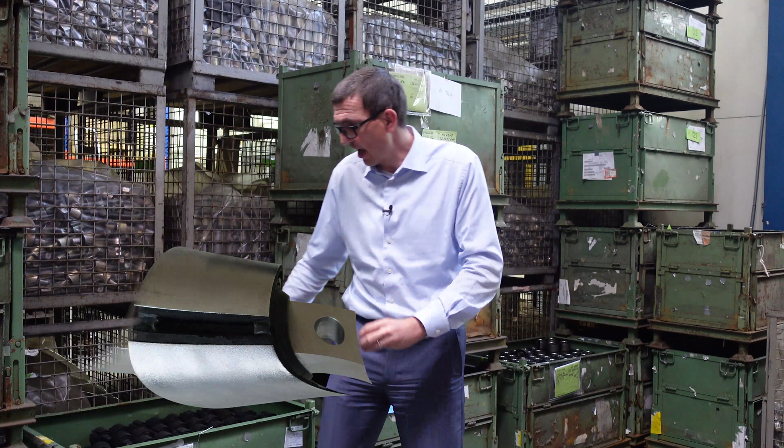Today, I want to continue to talk about further activities. We have applied this technology to a new group of products, to slit bushes. I have prepared a slit bush here. Oops, sorry. Here you see the slit bush. That's the typical slit. That's a bush with a pin, with a metal pin. If you want to learn more about slit bushes, I refer to our videos regarding slit bushes, where you can see how a slit bush works in detail.

This bush consists of a pin, of a solid pin, and cylindrical parts in the middle. So we did the same as we did for the spherical joints. We just replaced some heavyweight steel material by plastic. With this part, we achieved a weight drop by around 850 grams, which is again more or less a third of the overall weight of the original part. So that's pretty nice, I think. That's a pretty good achievement. And of course, we've performed all the FEA calculation as well.

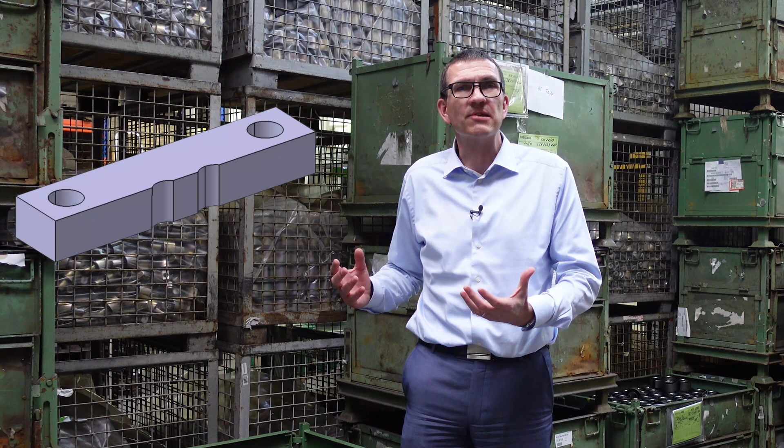So how did we do that? I would just put that away, because even if it's light, it's still heavy after a while. Okay, well, how are we going to do that? You can see here the pin, how it looks. It's a very cubical design, and it looks a little bit strange with these 2 rails there, with the 2 notches there on the side, but very smooth notches, not very sharp notches, so not critical. And it's made of flat steel. It's made with a very minimum of machining.

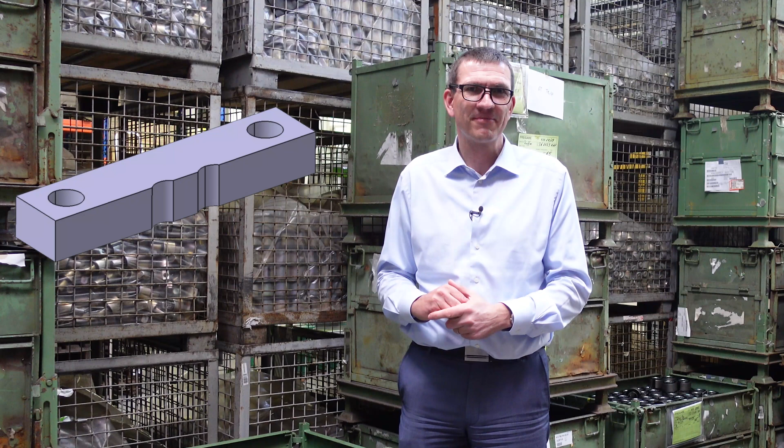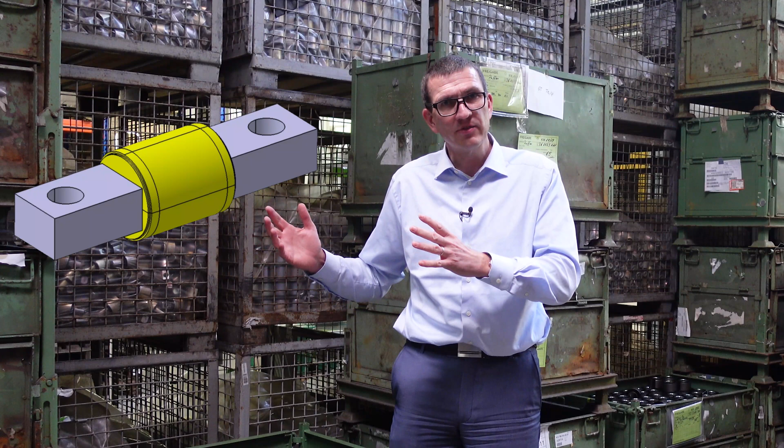And next step is we have 2 half shells made of plastic, and then we move them together, we assemble that, we mount that together and get one cylindrical overall pin. So this pin then will be taken and put into the vulcanization tool, and we do the vulcanization process as it would be very normal with a classical pure metal pin design.

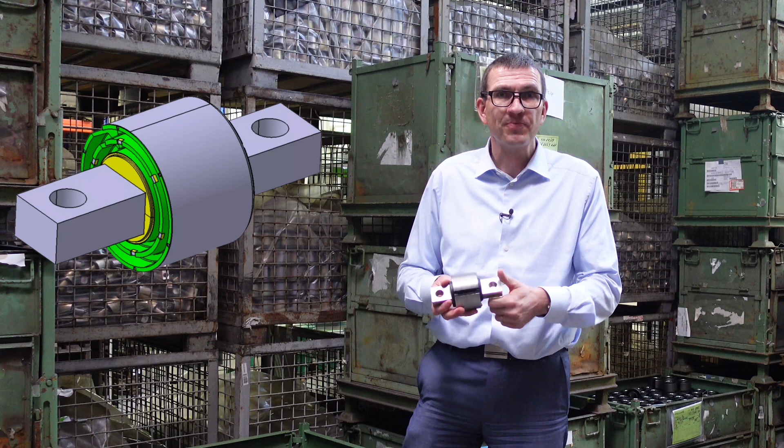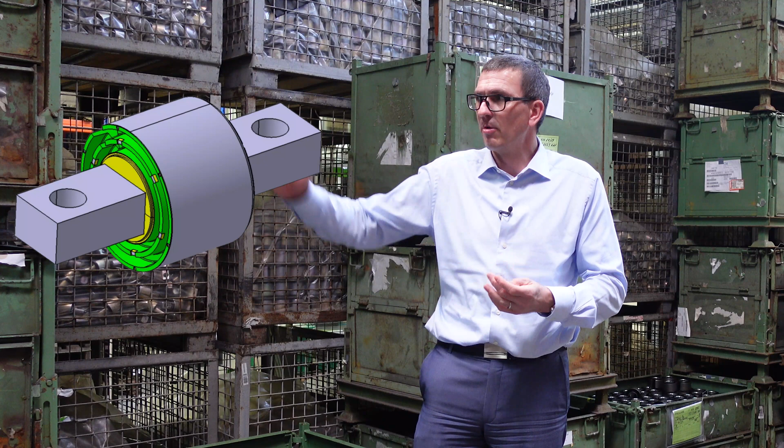So, and then from the outside, it looks like a very normal slit bush. So from this perspective, you can't distinguish this lightweight design. I mean, you could if you would hold it in your hand, but just optically, you can't distinguish this one from the classical heavy design. And of course, to get a little bit more idea about the details, we've just cut off one edge so that you can have a look inside.

And of course, our spherical lightweight design part was built the same way, so we have another cut of this part here. So what's the trick with the flat cubical pin? The trick, the idea, is to use a flat steel material which is drawn in advance and then very cheap. So it's produced with the final tolerances, with the final dimensions, and we just have to machine the two holes

and machine the notches. Talking about the notches, actually the notches are the main difference of this pin design to a classical pin design. Taking a normal slit bush with a solid pin like this one here, you see a sharp notch here in this area, in this edge. Can you see that? And if the pin cracks in operation, it will start here or there.

And this is the big plus, the big advantage of the new design, because we've just taken out these kinds of notches. So if you don't have a notch, you don't have very high tension due to the notch. That's logical, right? And therefore, even if you have the same level of mechanical tension in the same area, it would be significantly less critical because you don't have the notch.